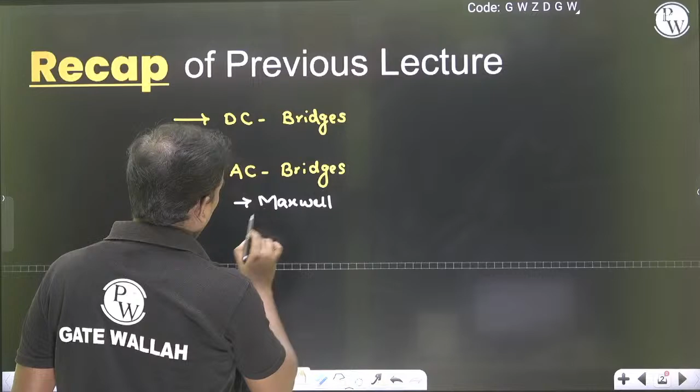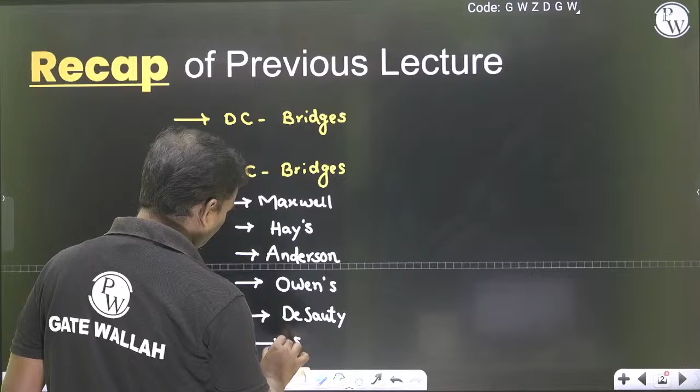Okay dear, chalo. So under the AC bridges we have discussed the Maxwell. Next we have discussed Hay's. Next we have discussed the Anderson. Next we have discussed the Owens. Next we have discussed the De Sauty. We have discussed the Schering. Then we have discussed the Wien's bridge also. Okay, so these are the various bridges that we have discussed.

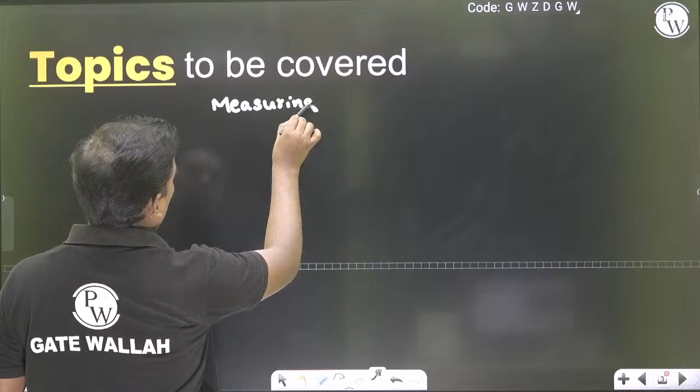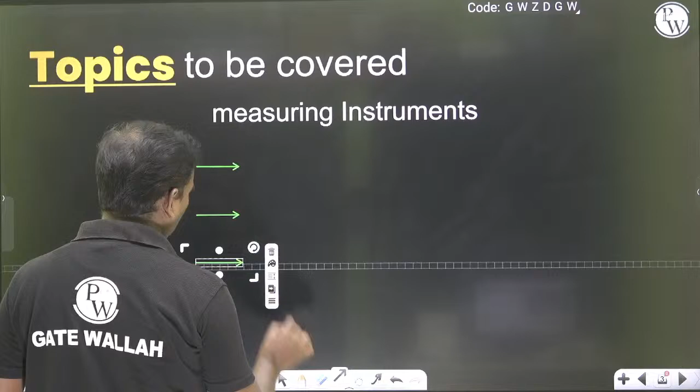So we are going to cover the measuring instruments today. Okay, so measuring instruments. So measuring instruments ke andar hamare paas kya kya topics aayega. So first we are going to get the PMMC, moving iron, dynamometer. Okay, so these are the list of the topics that we are going to discuss today.

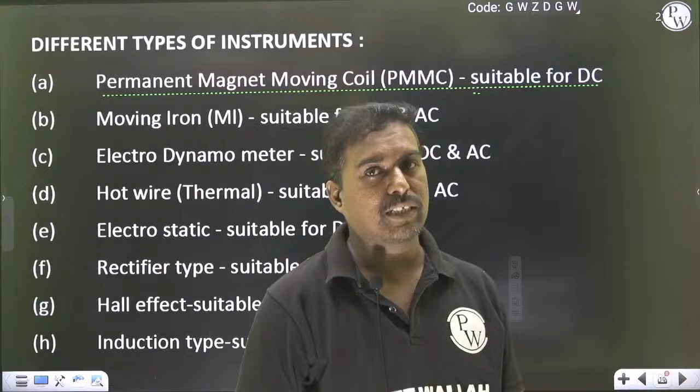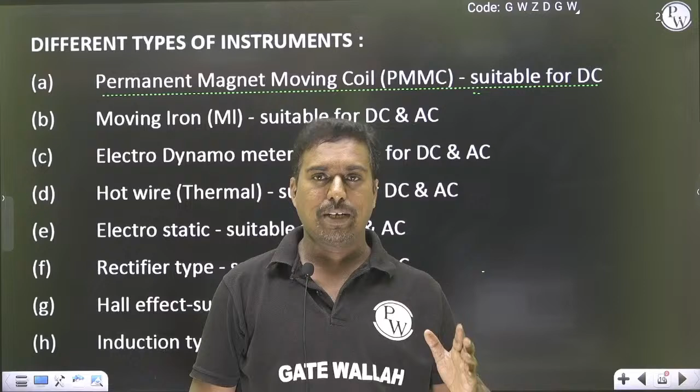Chalo please note down, PMMC stands for permanent magnet moving coil. This is suitable only for the DC measurements, so that is one of the expected bit also in IES exam and GENCO state level exams. So it is only suitable for DC measurements, it is not suitable for AC current and AC voltage because it is not having the mechanism to respond for the different variations of the frequency of the input signal. So isliye ye particular instrument keval DC instrument ke liye suitable hai.

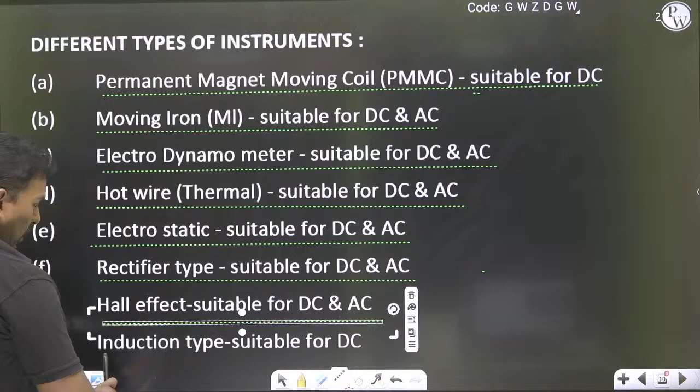So these are suitable for both DC and AC. Next electrostatic voltmeter, this is also suitable for both DC and AC. Rectifier type instruments, that is suitable for both DC and AC. Hall effect suitable for DC and AC. Induction type suitable for DC - induction type is suitable for AC, sorry, okay, this is for AC.

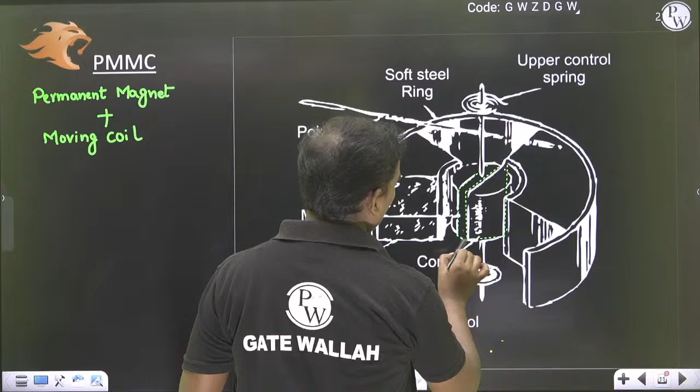So here this is a permanent magnet, in the permanent magnet a current carrying conductor is kept, okay, so this is the conductor my dear. So in this conductor, so if you see this is a conductor, so this is the conductor, so this is our conductor, and this conductor is protected with, so these are multiple turns of the copper winding.

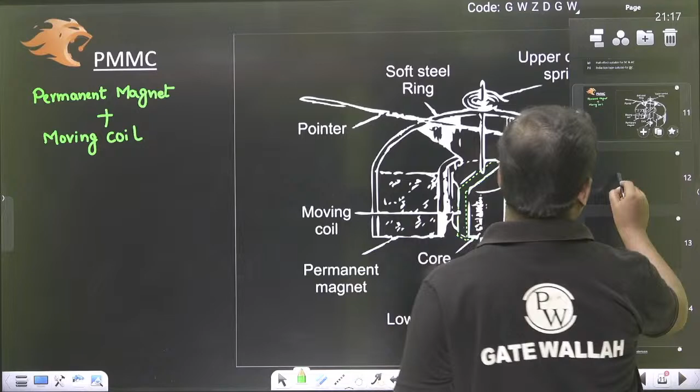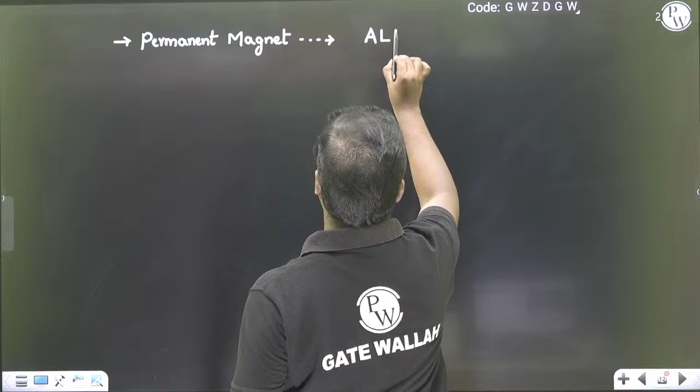Chalo, so if you see this now, the major thing is the materials. So what are the materials, let us see here. The materials suitable here are what type of materials we are using for the construction of the PMMC. So the materials are, the first one, the permanent magnet, so the permanent magnet, the material is Alnico material. Okay, please note down the materials, please make a note of these materials.

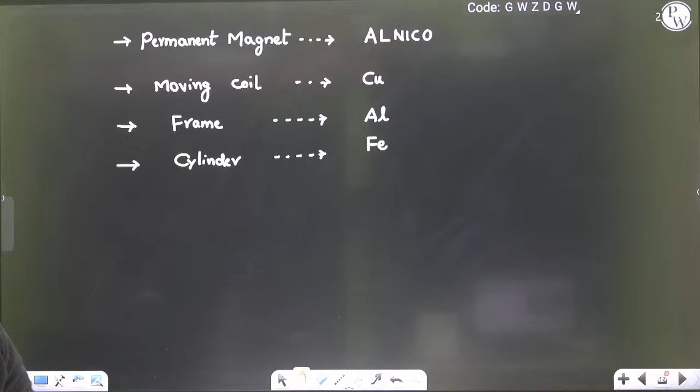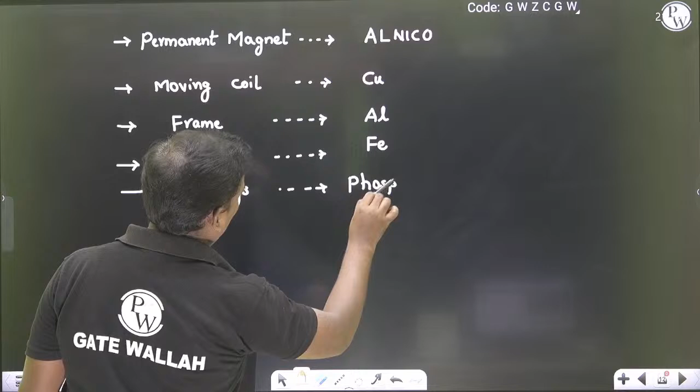So this is with ferrous. Next, the spring, phosphorus bronze, phosphorus bronze.

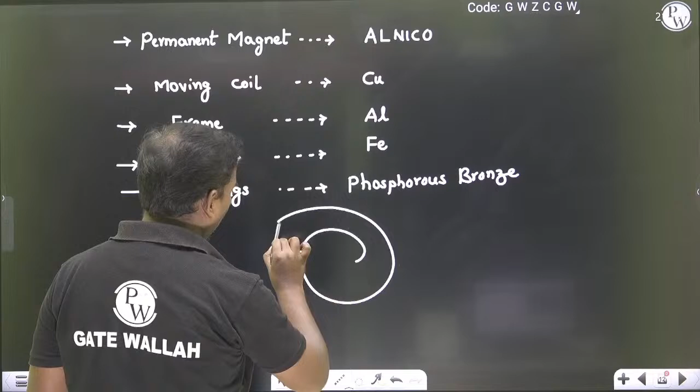So the major thing is the spring here. The spring is like this, wide and ribbon type.

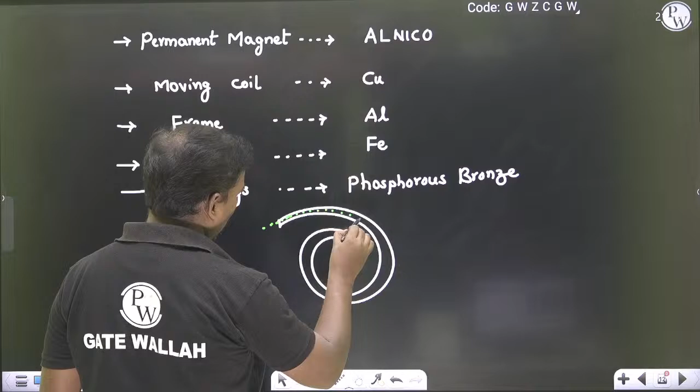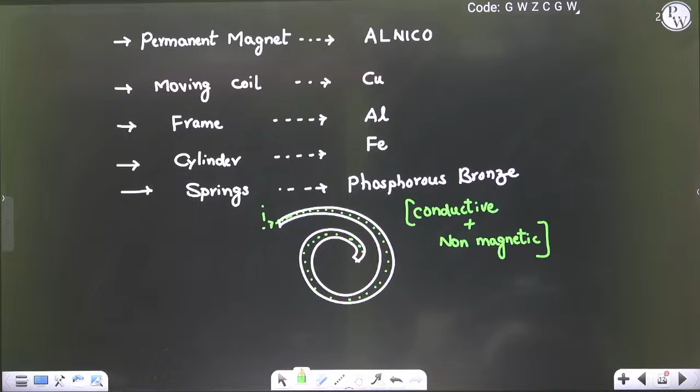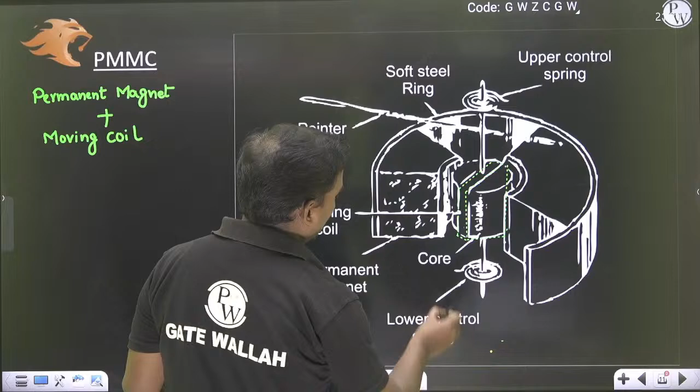The spindle is generally made of steel. So these are the major things. Now whenever a current is passing here, this is the way the current is entering.

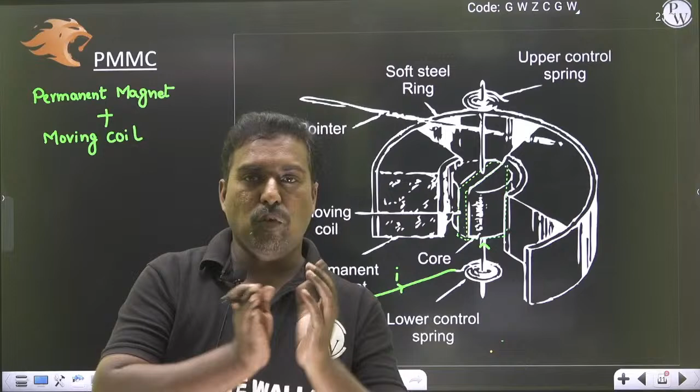So when a current carrying conductor is placed in a magnetic field, it experiences a force. Due to that force, it deflects, and that deflection will move this pointer. There are two torques here: one is the controlling torque, the other is the deflection torque, which occurs because of the presence of the conductor in the magnetic field.

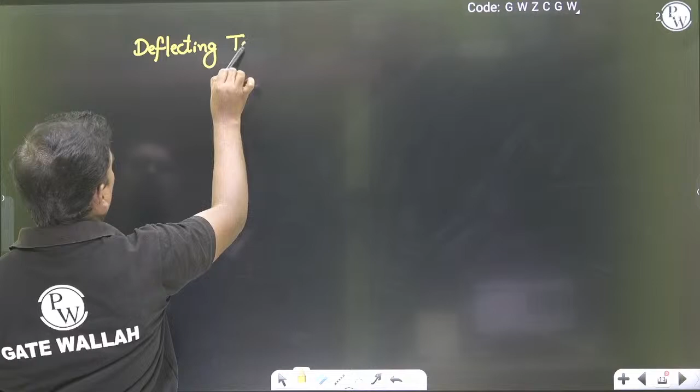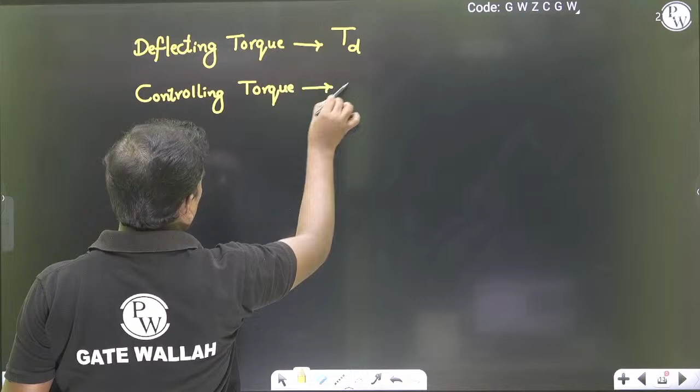Actually there are three torques in all measuring instruments. The first one is the deflecting torque, which I can give the symbol TD. Next is the controlling torque, with expression TC, and there is also a damping torque.

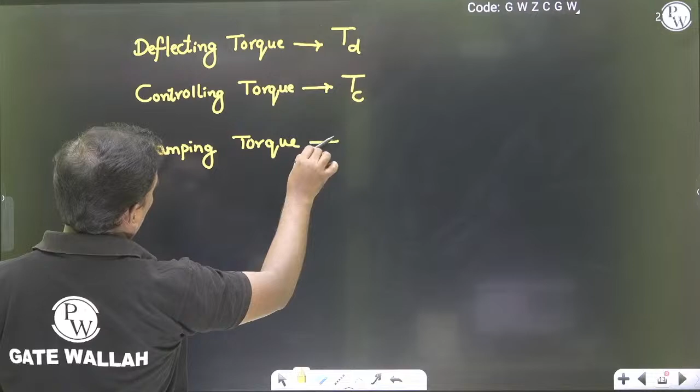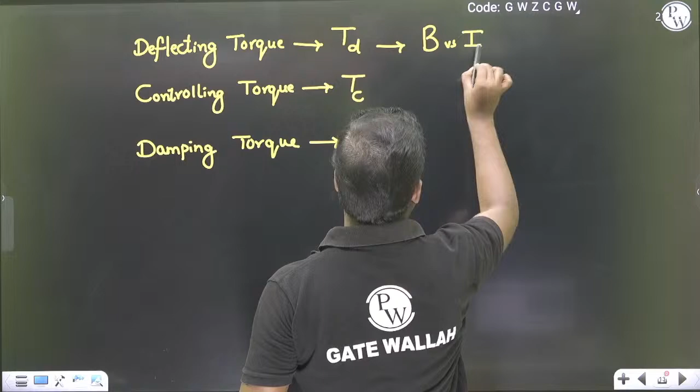The deflecting torque, TD, happens mainly because of the magnetic field B versus current. So it is because of the flux versus current, and because of the interaction of flux and current, this deflection torque happens.

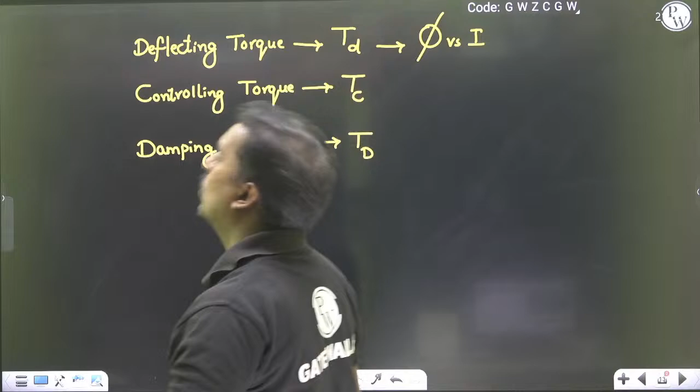Now, the working principle of the galvanometer. The D'Arsonval galvanometer is a derived version of the PMMC.

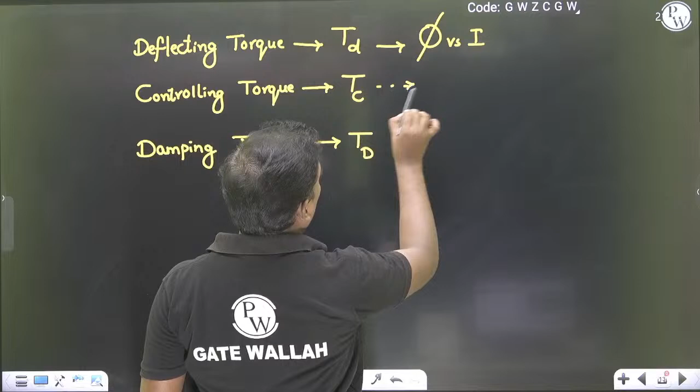The controlling torque is generally provided because of the springs. Why? Because if only the deflection torque is present, the pointer goes on moving like this and it is not going to be stable.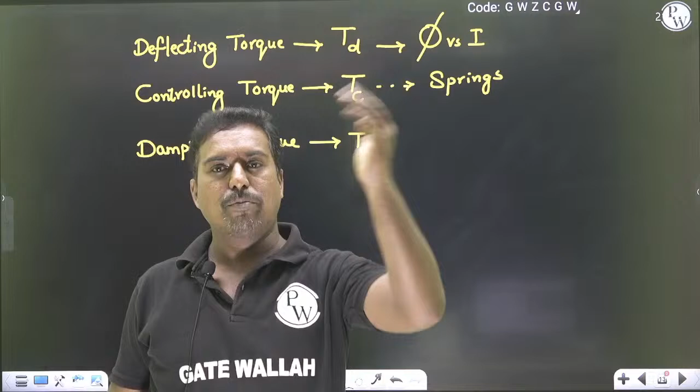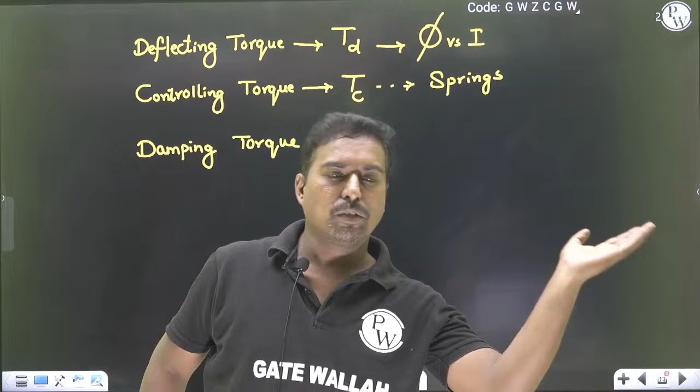If a current of 2 amperes enters, my needle should start at 0 and settle at 2 amperes. If there is no controlling torque, the needle will move from 0 to the dead end. So deflection torque and controlling torque both should be balanced. But even when both are balanced, the pointer cannot come to the settled position immediately.

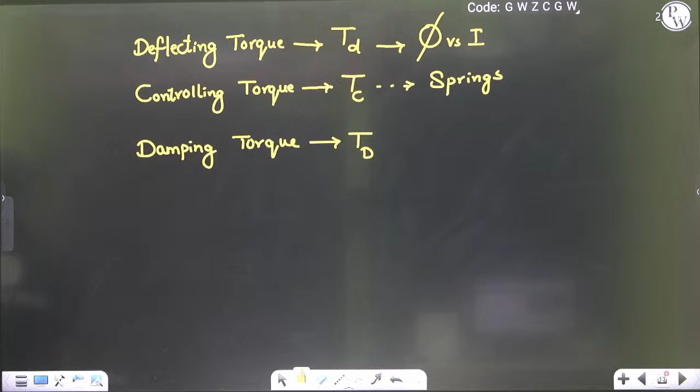Now it has settled. Deflection torque and controlling torque both are equal.

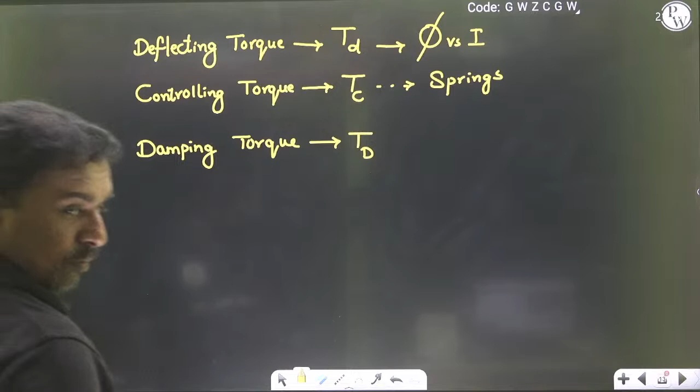Okay, so this is about the damping.

I don't know why it is happening today. Lot of issue is happening.

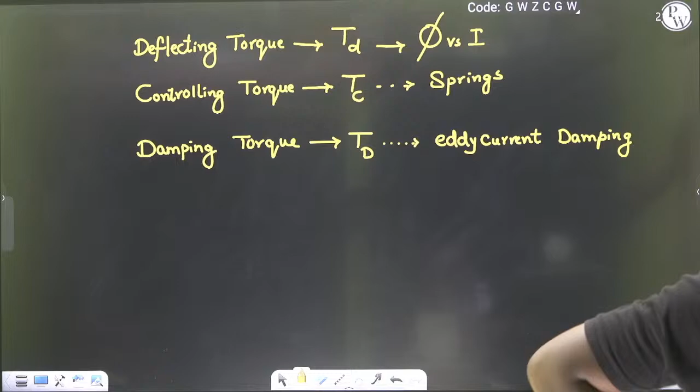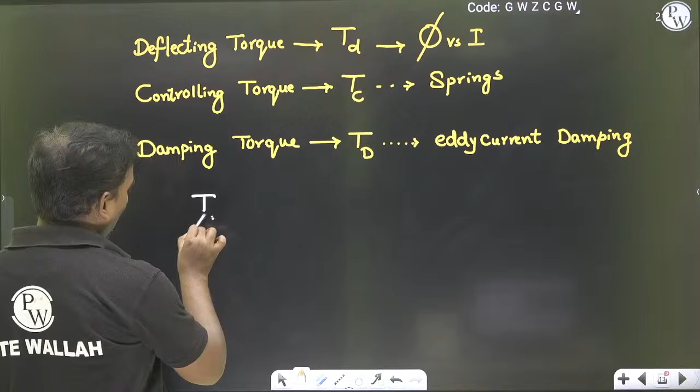So here for PMMC, the damping effect happens because of the eddy current. Now, if you see the expressions, the deflection torque expression is given by BINA.

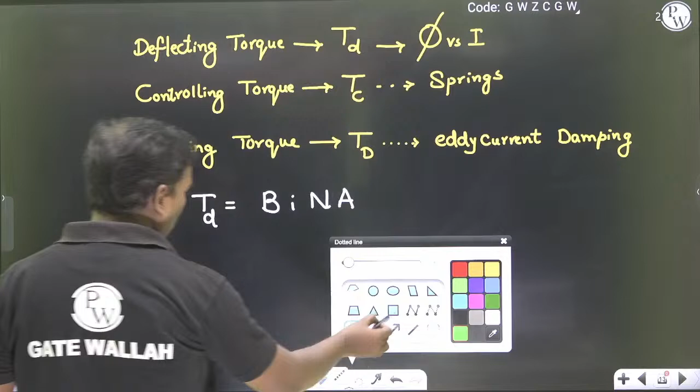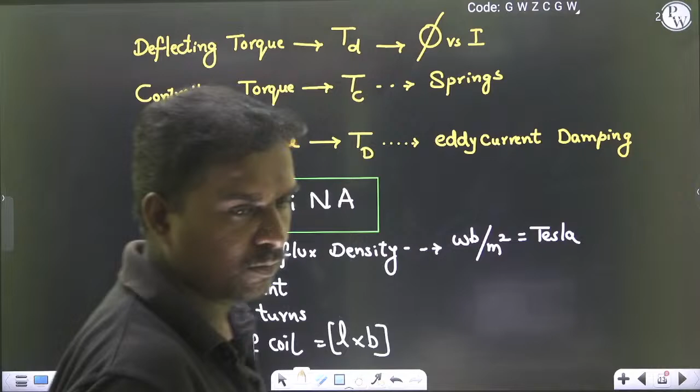I'm not deriving that expression, I'm just using it. We are not interested in the derivation part here. So what is B? B is the magnetic field. This is not important, derivations are not important for the GATE exam.

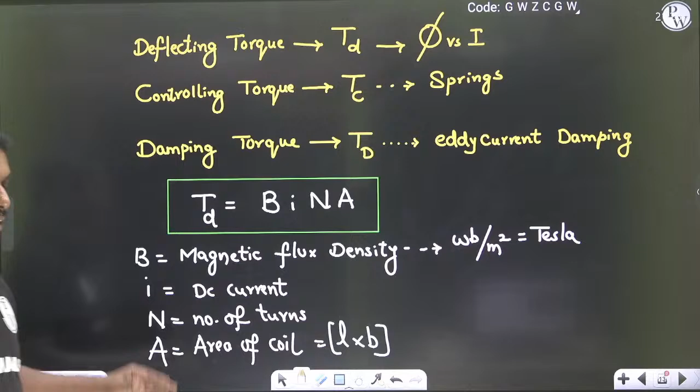So B is the magnetic flux density, I is the current passing through, the DC current which is our measurand. This is not important for the GATE exam, but for your semester exams it is. N is the number of turns, A is the area of the coil, and L into B. Now it's clear.

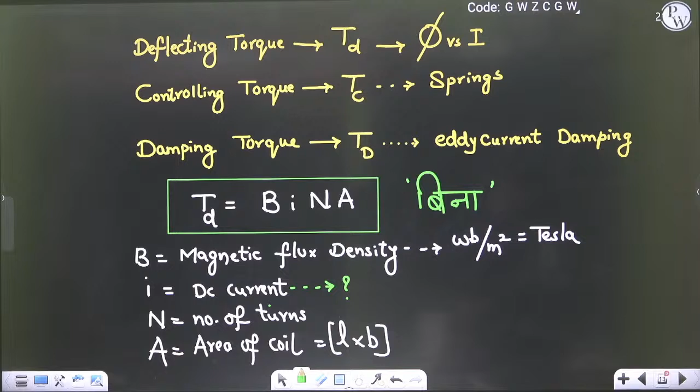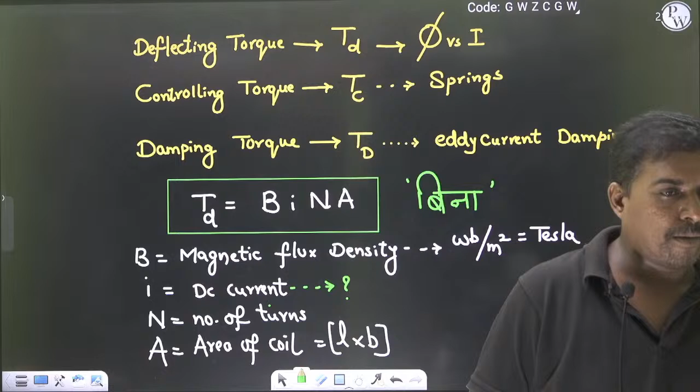So this is all about the deflection torque.

Now let us go for the controlling torque. The controlling torque is given because of the springs. The controlling torque expression is TC, equal to Kc into theta.

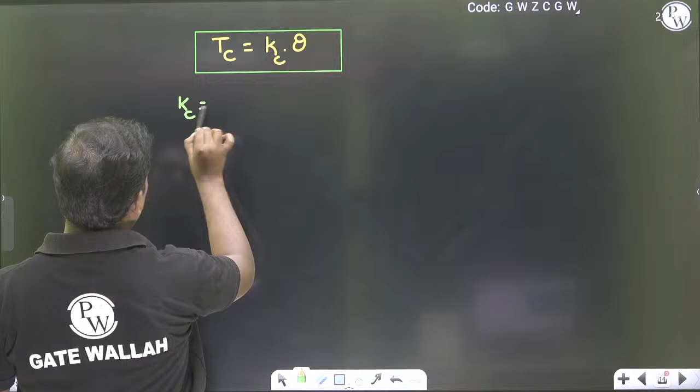Please note down all these formulas, we are not deriving this expression. Kc is the spring constant, which can be taken as Newton meter per radian.

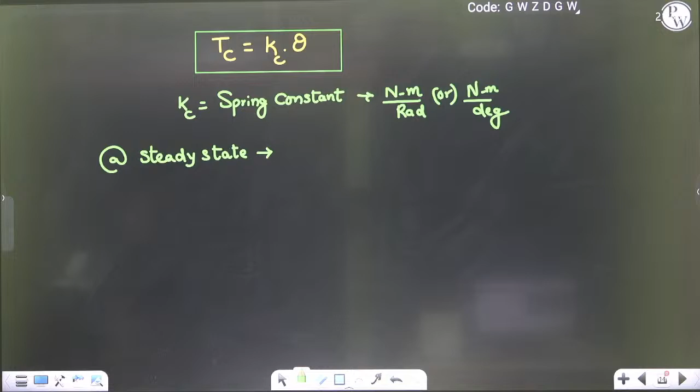Sorry, there was a bit of disturbance in between. So at steady state, I can write deflection torque is equal to controlling torque.

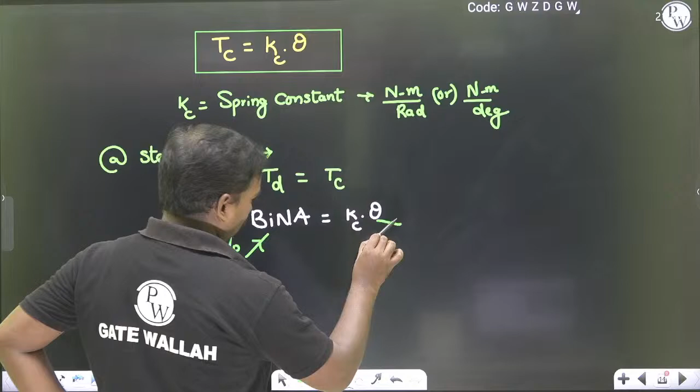So deflection torque I can write as BINA, and controlling torque I can write as Kc into theta. This is the output, this is the input. Try to understand, this is our input current, and this is the output deflection, on the dial we are going to get the deflection.

We are going to get the deflection like this.

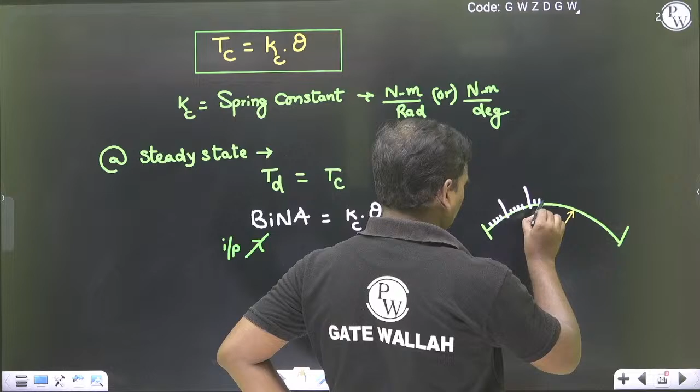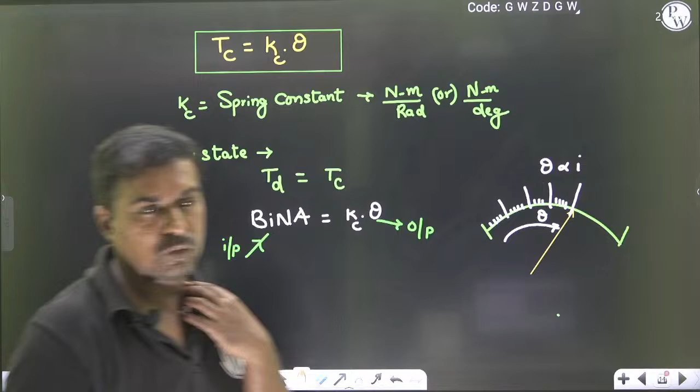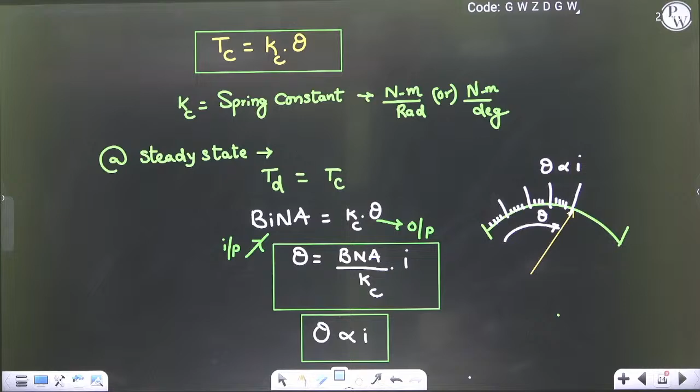So this theta is directly proportional to current. The output deflection is directly proportional to current, so if you see the graph, this theta is proportional to current.